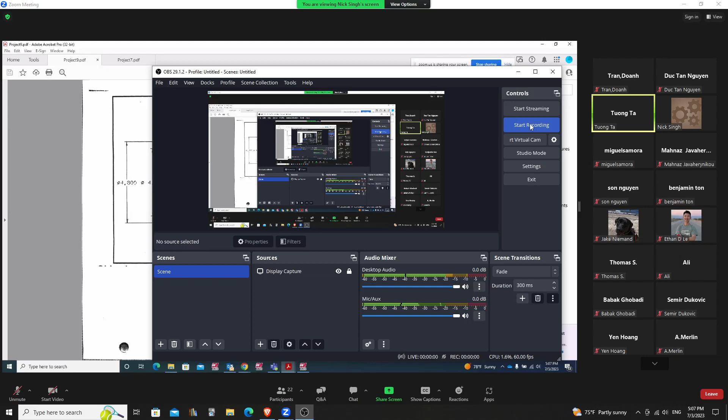So this is your project number 7, I guess, right? And here is your project number 9. I uploaded both the blueprints. You guys received the blueprint, right? Yeah, sure. Okay, good.

Okay, let's go over this project, your project number 9. Your project number 7 is pretty simple, straightforward. I want you guys to do this. So this is something I'll go over in brief, and you guys have to finish it. It's pretty simple, whatever we talk about. I'll come back and we're going to talk about this later on. This is something I want you guys to do, but I'll go over all the tool paths on project number 7.

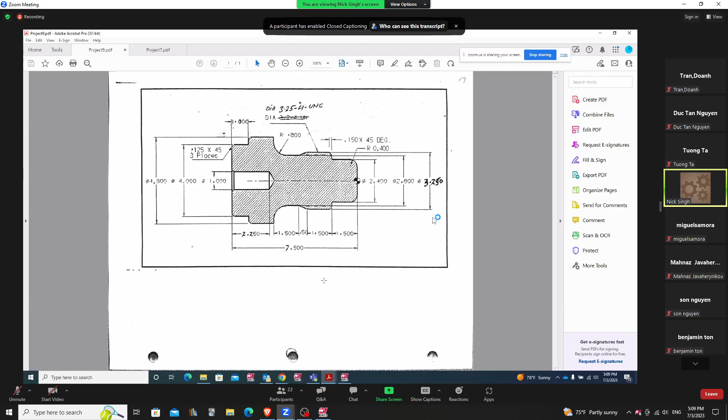So on this project, what we're going to do, if you look here, the part is a finished part. So we have two operations on this part. First we have to hold onto the part on the jaws. This is how we're going to hold onto the jaws. The jaws are going to be something like this, and we're going to hold onto the jaws right there.

We're going to face this side first, and then we're going to OD rough and finish just up to here, up to this point. But this side you cannot cut. We're going to flip it over and do the other side in second op. So here we're going to face this, OD rough and finish, and cut the threads. So this side will be done.

Then we're going to flip over, and then we're going to hold onto this diameter right here. That's how we're going to hold onto the jaws right here. And then we're going to face this side, whatever the leftover material is, we're going to face, and then we're going to drill it, and then we're going to bore the other side. So it's going to be two different operations.

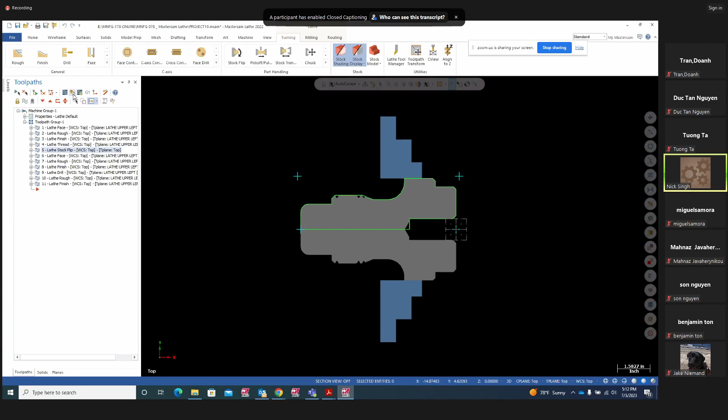So I'm going to run this whole part and show you how this works. Then we will go from there. Look at this here. The first operations: face, rough, finish, thread, and then we're going to flip it. So we'll go ahead. I'm going to do an operation change, I mean tool change, and we're going to cut it.

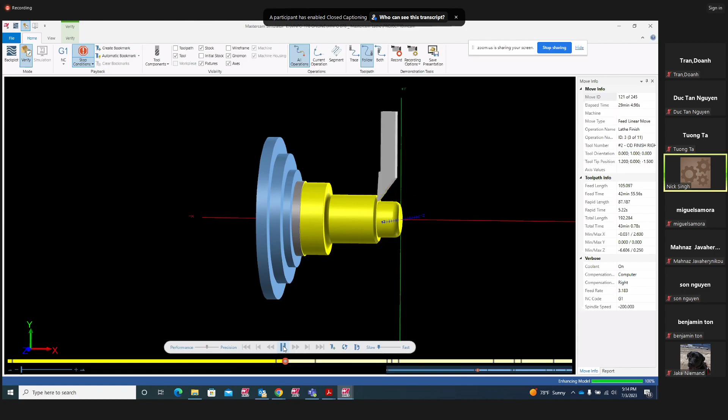Look at this. We're going to go slow. So it's going to face this side. Then it's going to rough. So here comes your roughing operation, and then you're going to just go ahead and finish it with the finish tool, one pass. Up to here. Just keep an eye on that.

I'm holding on to the maximum diameter here, but I'm finishing up to here. Up to here means, if you look at this blueprint, I'm cutting up to here. We're facing it, OD turn, rough, and finish up to this mark right here. We're not touching this side. That's where I'm holding onto my jaws. This side is not done. I'm just doing this part right here. So we are basically taking care of this area right there.

Okay, so now I'm going to cut the thread.

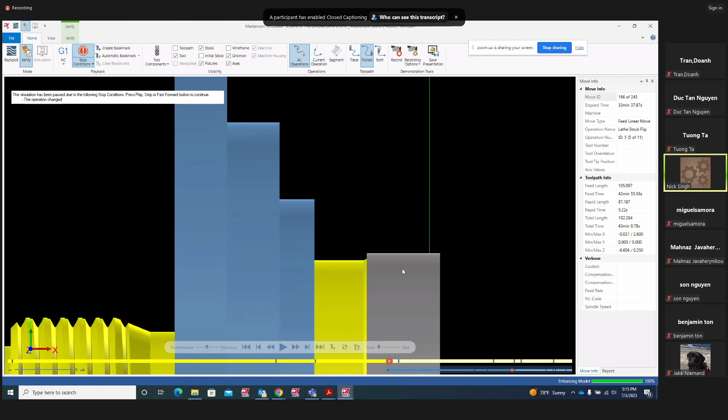Here we go, the second op. It flipped the stock, this side is done. Now we flip that and we're going to hold on to this diameter, the finished diameter, and this is whatever is left over. If you look, we have to face this because there's still material left over. Then it's going to rough and finish this side, and then it's going to drill, center drill, and bore this side. So let's do it.

Here we go, it's going to start facing it. Then it's going to start OD rough.

If you look here, now we are working on the back side, right on this side. We face this side, we OD rough this side, finish it, then we're going to center drill and bore. There comes your finish, and there's your drill, and there is your boring bar. It's going to bore the other side.

And that is finish pass, and we are done with the part. So this is going to be your finished part.

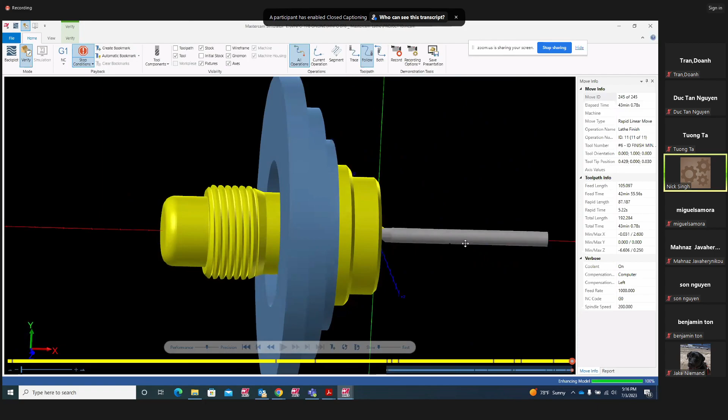First we cut this side right here. Then we use the flip operation. We flip and finish the other side. So this is what you guys have to do on this part. So let's go ahead and I'll show you how that works.

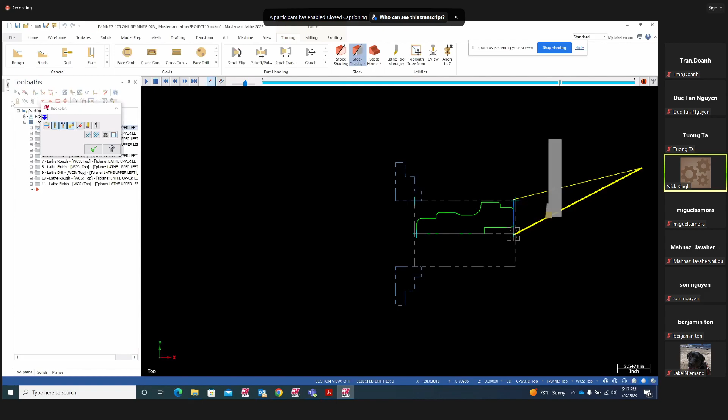So the way we're going to start with our original geometry: here we go, we're going to face that, then lathe rough, you're roughing. This is the other side, that's why it looks like that, the geometry is flipped over. So let me bring out the original geometry, and then we're going to start programming that.

Face, rough, finish, thread, stock flip. File open, and that file is going to be on my right here. Don't save it. Oh, my Mastercam crashed.

Okay, let's go find it one more time. File open, shared Mastercam. There you go.

So this is your original part. When you have to draw this, I'm not going to go over the drawing, the geometry, you should be able to do the geometry. So this is the geometry you have to draw, guys. If you look at your blueprint, it's right here.

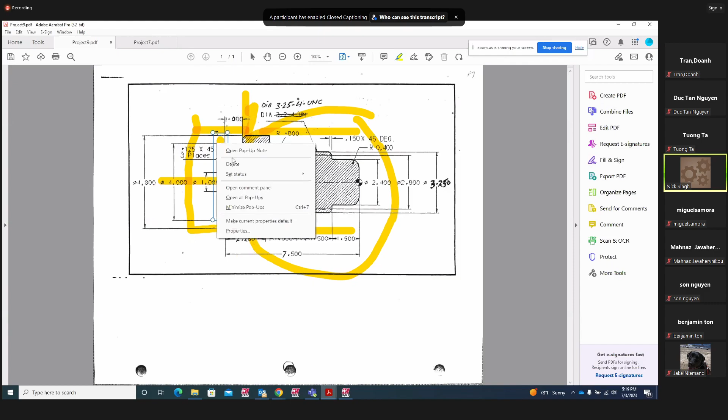So this is your blueprint. You have to draw just this area right here, the top part, just this part right there. But here we have to draw this geometry because we're going to use this geometry to flip it over and face it. Then we have to draw this one.

So we have to center drill, and then we're going to go ahead and bore it. So this is the geometry. If you look here, I have drawn it right there. There we go, that's my geometry.

So I'm holding onto here, but the first operation I'm going to do, I'm going to face it, OD rough up to here, up to this chain. We're not going to touch that. That's how we're going to just do up to here, and then we're going to thread it, then we're going to go ahead and flip it.

So this is very important to understand that the overall stock size, how much material, is going to be my total material length and the diameter. The diameter, if you look at the blueprint, my finished diameter is 4.8. So I'm going to put 4.8 plus 100,000 and 100,000 each side extra material, so it's going to be almost 5 inches diameter. So you have to pay attention that my stock diameter is 5 inches, and my overall length, if you look here, is 7.5 finished.

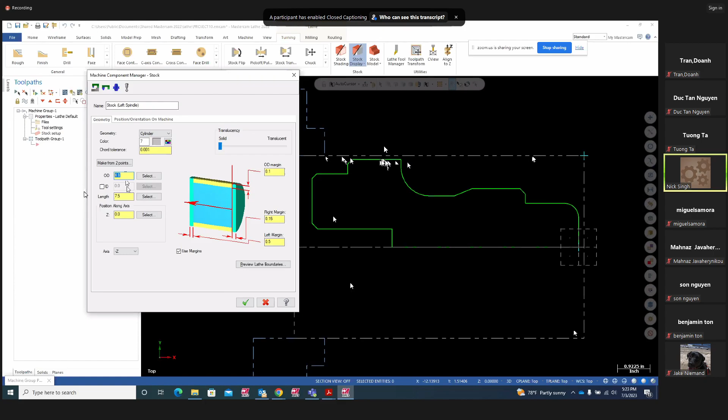That's the original stock diameter, 5 inches. Keep that in mind, because we're going to use that number when we flip it over. They're going to ask where you were holding earlier. When this is finished, this diameter is going to be the finished diameter, which is 4.8, not 5. This is my stock, the gray line you guys see, the stock line, that is 5 inches diameter right now. But when it's finished up to here, we're going to hold on to this diameter. This diameter is going to be 4.8. So we have to remember that.

Now, overall length, this is very important. The overall is 7.5, and this is 150,000 here. That's the transfer position, and we're going to use this number in our flip. So that is 150,000 on the face. Remember that, we got 150,000 on the face. So 150,000 plus 7.5, that's going to be the overall length.

That is my stock position. Overall length is going to be how much? 7.5 plus 150,000 is 7.65. Z minus total is 7.65 from the face, from the origin to here is 7.65, the stock length. The reason I'm calling these numbers, because these numbers we need when we're going to flip the stock over.

Keep that in mind. And then, this is the finished part, we're going to hold on to over here somewhere. So how much is that going to be from the Z distance? It could be 1.5 Z minus, it could be 1.6. I'll show you that, so that's going to be my final position on the other side.

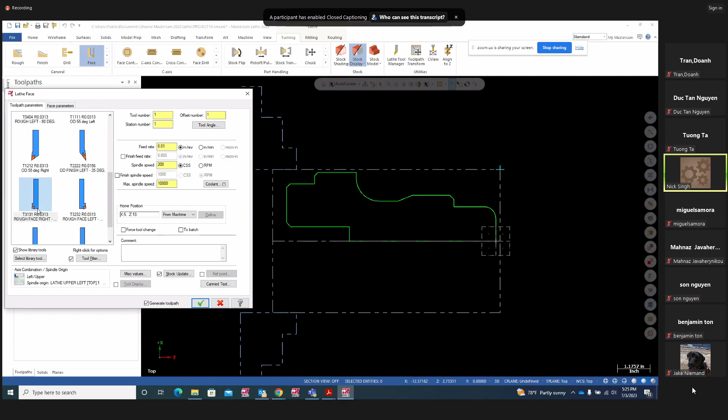So for facing, I'm going to use my OD face, 80 degrees. And here, rough step over, we can use whatever we want, 50,000, 25,000, 30,000, doesn't matter. And okay, so we're going to face it, standard, whatever we've been doing. So now I face this, we finish the face, we can start from here now.

Now I'm going to go ahead and rough it, and I'm going to rough it using my partial chain option. Don't pick chain, otherwise it's going to select this whole thing. Partial - so partial, I'm going to start from this arc right here, and I'm going to go up to here, that's all I'm going to finish. Hit end chain, okay. And I'll use an 80 degree insert tool holder.

Rough, standard, we're going to leave 10,000 on X and 10,000 on Z. Lead in, lead out, straight in, lead out, straight out. You can go this way or that, doesn't matter in this case. So hit OK.

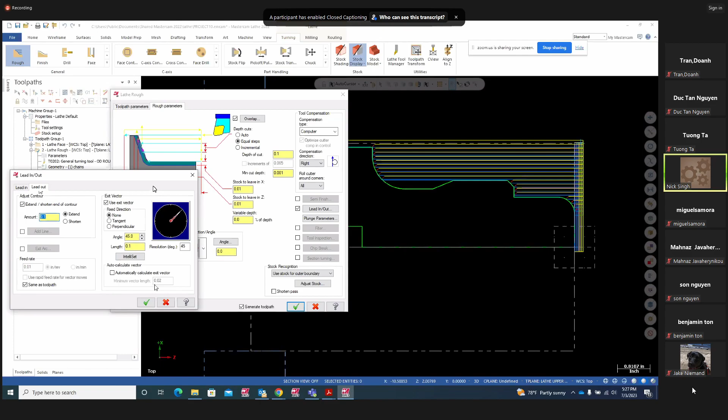And here, disable stock, use stock outer boundary, and rough it. There is my roughing, if you look here, I'm going up to here. I can go ahead, if I want, I can extend that a little bit under lead out. Extend that out another 100,000. And there you go, it went over the chamfer. So I finished up to here, that's my OD rough.

And there comes my OD finish. I can use the last chain, so just use last. And again, going up to here. Hit end chain and OK. And here comes my 55 degree tool holder, should be here somewhere right there. Hit OK.

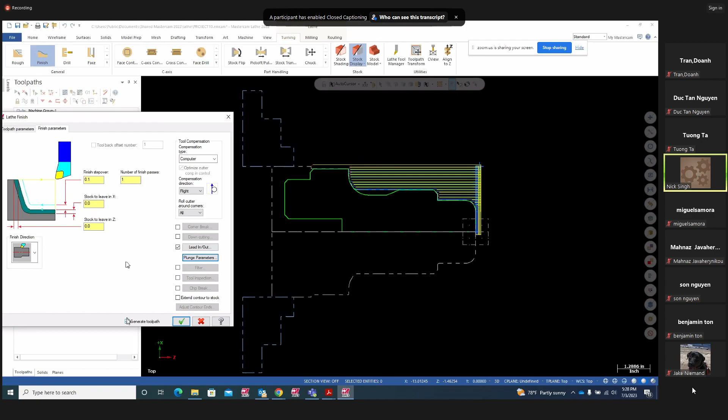Finish - I'm going to use plunge parameters, this guy over here, because I'm going to plunge into this so it can take care of that. Hit OK, and hit OK. So there is that. Select all and let's run it.

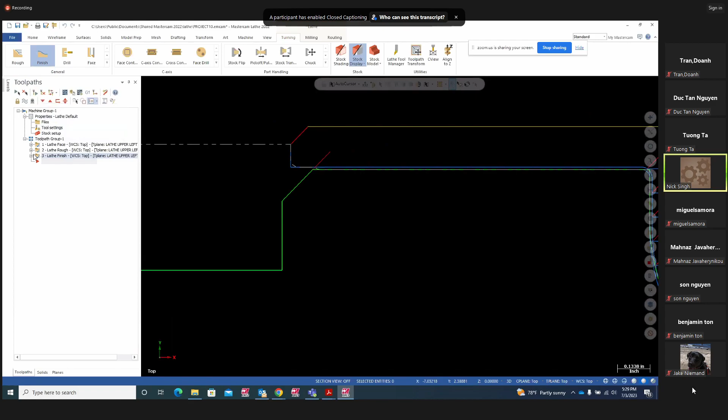Okay, we have to extend this also on the finish, I think we forgot to do that. Yeah, we forgot to do that finish, so we have to extend that also on the finish pass, another 100,000 or 150, I don't know how much we have here. We have on this one lead out 100,000, so we can go 100,000 on finish also under lead out. Extend 100,000, we're gonna go ahead like this right there. So that's good now, okay.

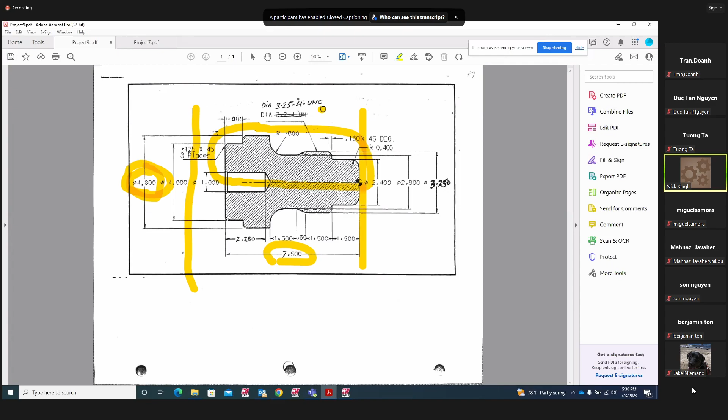Now if you look, the only thing left over here is the thread. We have to cut the thread, and we are cutting 3 1/4, 4 TPI, threads per inch, 3 1/4 diameter - so, I mean OD diameter of your thread, 3.25. So let's go ahead and do the threading. There comes my thread.

This is our right hand thread, so make sure you use OD thread right. If you're using left hand, use OD thread left.

Pick that option, and here you can type the lead number, or you can go compute from formula. I'll just type my lead here. My lead is 4, and my major diameter is 3.25, and that's it. It will calculate the minor diameter by itself from the major diameter.

So start position is right here, that's where we can start. I can say start position over here, that number is Z minus 1.5. If you're going to start further out a little bit, you can do that, but this is a good place. And end position, I can end a little further out over here. So hit OK, and there is my thread.

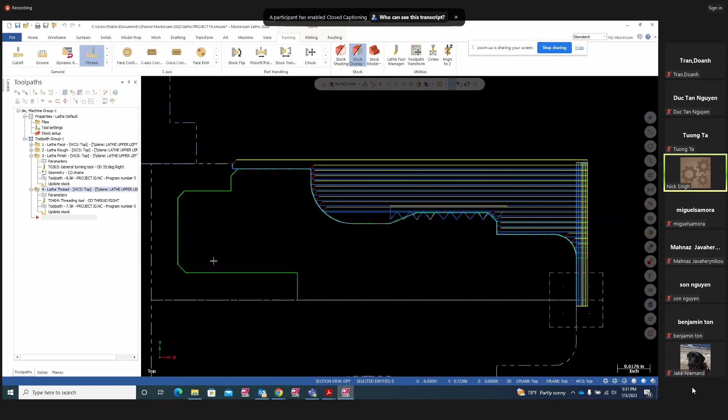There is my thread. So we are done with the first operation on this side. We faced it, we OD roughed it, we finished it, we cut the thread.

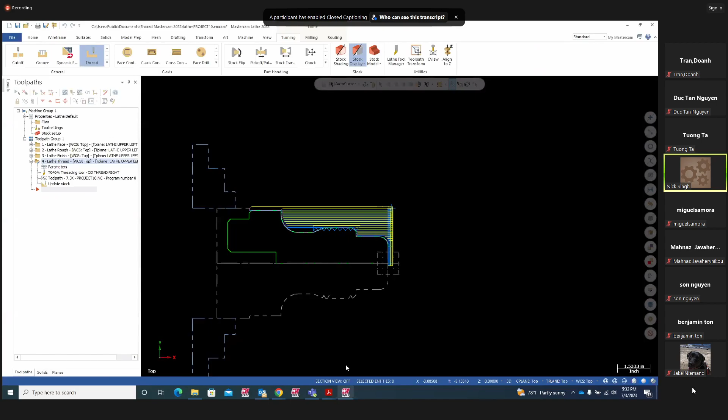So I'm going to select all and let's verify this, to verify it.

There we are. And finish. And thread. And we are done. So this side is done.

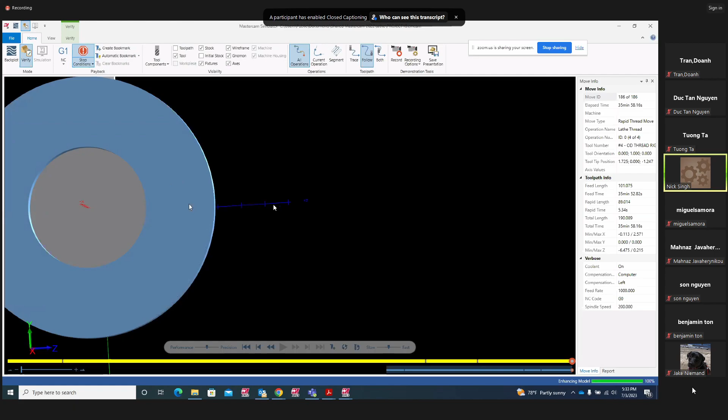Now look at that, I have to finish the other side now, this side right here. So that means I'm going to flip it over. Now when we flip it over, the jaws are going to hold onto this diameter, not on this one.

So this is what I was talking about, that this diameter is 4.8 plus 200. This diameter was 5 inches, now this diameter is 4.8. So when we flip it over, we have to tell it my original diameter was 5. Now this is 4.8, and when I flip it over, I'm going to hold it onto finish over here somewhere, so my tool can come and face and turn this off.

So now basically I'm going to flip it over like this, so my jaws are going to hold onto over here. So how much is going to be my distance from the face of the part to here? We have to figure it out. It's going to be Z minus maybe 1.5, maybe 1.6, maybe 1.7. We'll figure out a good number where I can hold my jaws over here.

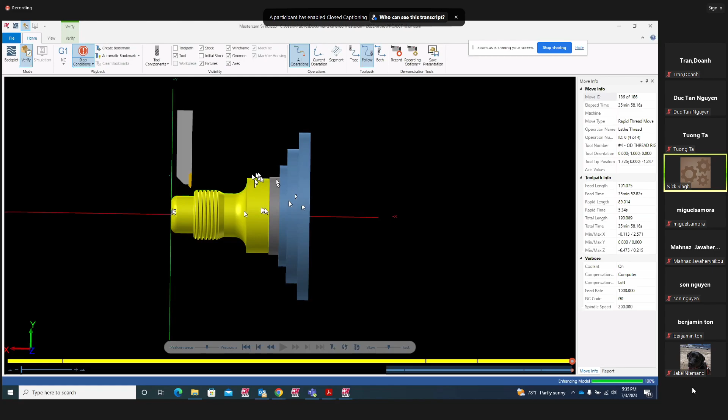So keep that in mind. And now the overall finish of my stock is 7.5, the length is 7.5. If you look at your blueprint, this is 7.5. But we have 150,000 transfer position from the origin. We have 150,000 extra on the first operation, if you guys remember. So that 150,000, we have to consider that.

So that's what we're gonna do. Isometric, go to top right there. So now we're going to go ahead and flip it over to the other side.

So there comes your stock flip. It says output a comment and program stop in the NC code. So here you're going to stop this 1, 2, 3 after 4 operations. Your part is done, your machine is going to stop, you're going to say M0, stop it.

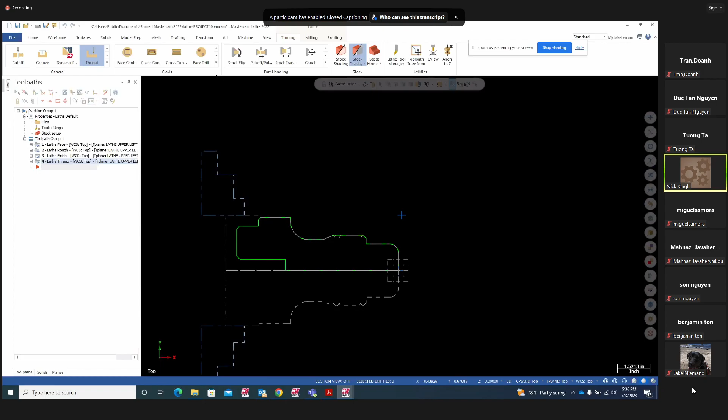You're going to take the part out and we have to flip it over to the other side. Then we have to set up your zero again on the machine. So here, after you've done this, you say stock flip, and look at this, this comes a new setup now. So this is what I'm talking about earlier, this is what I was talking about, what's going to be the original position of your Z.

If you remember, I told you that we have 7.5 and we have 150,000 extra over here, so total is 7.65. That number is going to go right here, your original stock position, that is minus 7.65 original.

We are talking about original position. Transfer position, we had extra 100,000, 150,000 material over here, that's where we want to transfer, because my zero is from here to here. My Z0 is 150,000, so that's where we want to transfer that, my origin. So here my transfer position is going to be Z.150,000.

Original position of the diameter - if you guys remember, I told you that we have overall 4.8 and we have 100,000 material each side, that's 0.2, so 4.8 plus 0.2 is 5 inches. So our stock here, original position of the diameter was 5 inches, and original position of the finish size is, if you look at here, that is 7.5.

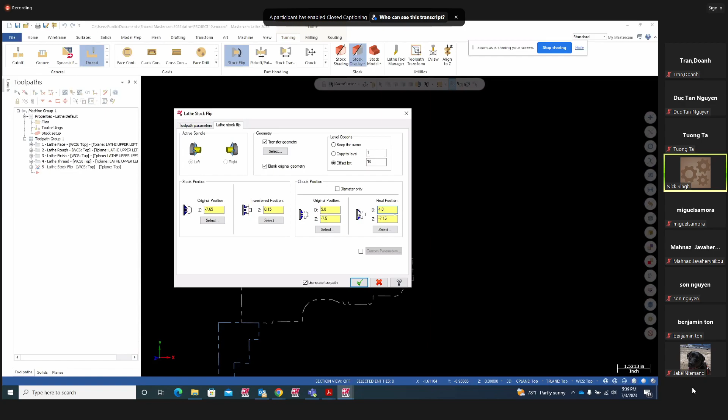So here, my final position where I'm going to hold is going to be 4.8. And once it's going to flip it over, where I can hold, I can try with Z minus 1.5. This number I'm talking about, from Z0 of the part to here, that's where I'm going to hold when I flip it over. I'm guessing it's 1.5. If we have to go further out, we can, I'll show you that.

So let's put Z minus 1.5. And here you're going to say transfer geometry. You have to check out this box. I want to transfer this geometry to flip it over.

Blank original geometry, this is going to be blank. If you check this, then you're going to have two geometries, your original and the flip over. Then you're going to get messed up with that, you're going to get confused. So you say blank, you do not want to see that other one. You want to only see the new one.

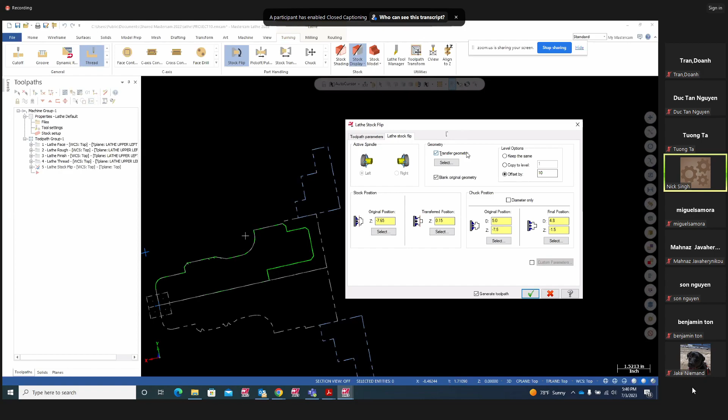And I'm going to select the geometry. So go to select, transfer geometry, blank the original geometry. After you have all these numbers, you say select the geometry. It says select entities to transfer. I'll go to my top view here and select all these geometries right there. There you go. End selection.

Blank geometry is on. As soon as I hit OK, it's going to flip over. Watch, there you go. My stock is flipped. And here is my origin finish.

This is the 150,000 I was talking about. So overall from here to here is your 7.5 plus 150,000, which is this number right here. If you look at parameter, that's 150,000 right there. So the machine knows how far it has to cut to make it zero. That's his 150,000 material left over on this side.

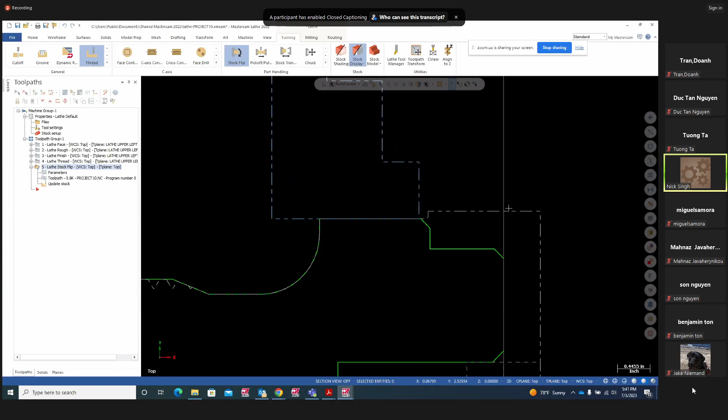Hit OK, and that's how it's going to flip. Now look at this, how far we are holding onto the jaws from zero. I put Z minus 1.5. If you look at here, I put that number Z minus 1.5.

I think that maybe my tool is going to, it's not going to touch, it's going to crash. So let's say I'm going to move my jaws a little over here. I'll try Z minus 1.6 or 1.7 or 1.750. I can hold it right here, so my tool is going to be all clear.

Because this diameter is finished, if you guys remember, we finished it on the first operation. So I'm going to change my Z from here to here. Go to parameters on lathe stock flip and say my Z minus, I want to go 1.7, minus 1.7. That's where I'm going to hold, 1.75.

Okay, watch my start, look at this. Now it's good. From the face to here, Z is minus 1.75. Let's say if I'm going to put Z minus 1 inch, or minus 1.2, doesn't matter.

You're holding your jaws over here. When your tool is going to turn this diameter right here, it's going to come and crash. So that position is from the face where you want to hold your jaws for the second operation. The distance is from here to here. Now I put 1.75, it's holding right here.

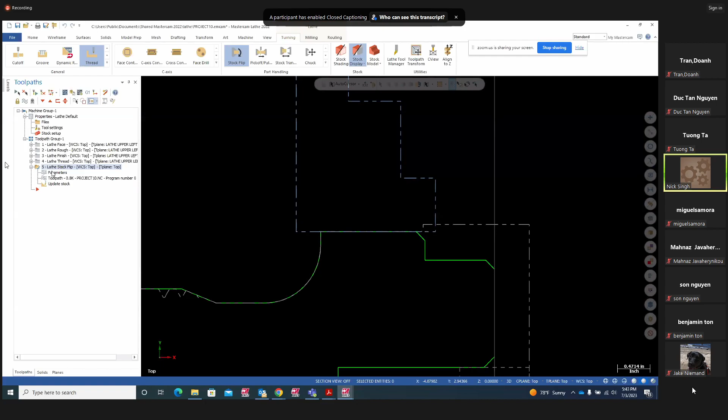So this is your jaws. When your tool is going to OD rough this geometry right here, it's going to crash over here. So keep that in mind. 1.75 is a good number right here, Z minus 1.75.

And there is that, that's your stock flip. And now we can just go ahead and face this because the machine knows how much material is left over on this side, it's going to face that. Then we're going to OD rough and OD finish up to here.

Then we're going to drill it and bore it, and we're done. So these numbers play a big role to get the finished geometry of your part. This matters because we are not parting, not cutting this part off like we do other parts. We don't have any extra stock, we are working close on the whole length, and that number depends on how much was in the face, how much is the total Z minus finish. That Z will control your depth and your diameter where we are holding earlier and where we are holding on the finish.

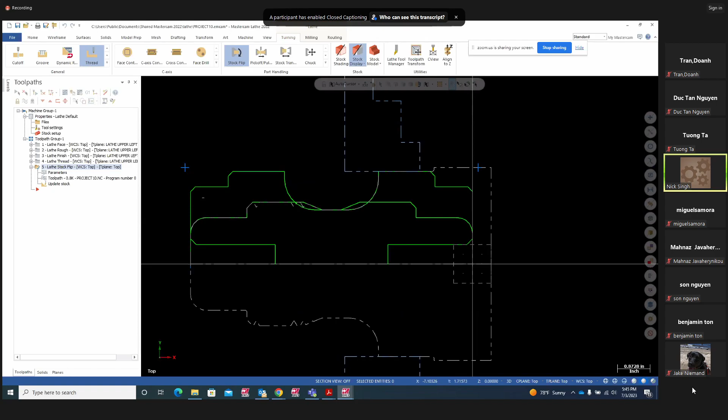Hit OK. So it flipped over, but make sure you guys transfer the geometry. Make sure you check that box, and when you say select, you select the entire geometry and say blank. If you say unblank it, look what's going to happen here. You see the original geometry, the one we used for the first operation, and that's going to confuse you as to which geometry to use for the second op. So make sure you blank it.

Now you have two geometries here, one for the first operation and one for the second operation, the one we flipped over. So keep that in mind. Say blank that - you do not want to see the original geometry right there. Blank it. Here we go. All right, so we are good to go.

Okay, dokie, let's move on. Now, after we flip the stock, we're going to go ahead and use the same operation. OD rough, OD, we're going to finish up to here, and then we're going to center drill and bore that. All right, face it. Let's do the facing.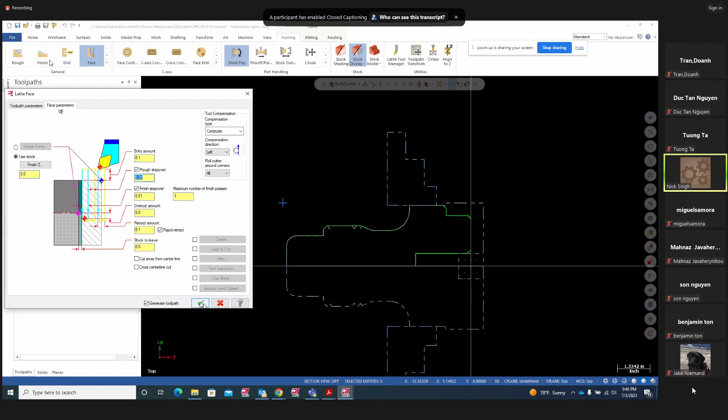There is my face. Let's use the same tool. Whatever you want to face it with, you can face it up at 50,000 each pass. That's good. Hit OK. We'll face this side - look at that. The extra material we had on the other side, it's going to face it off.

There we are. All right, so we faced it.

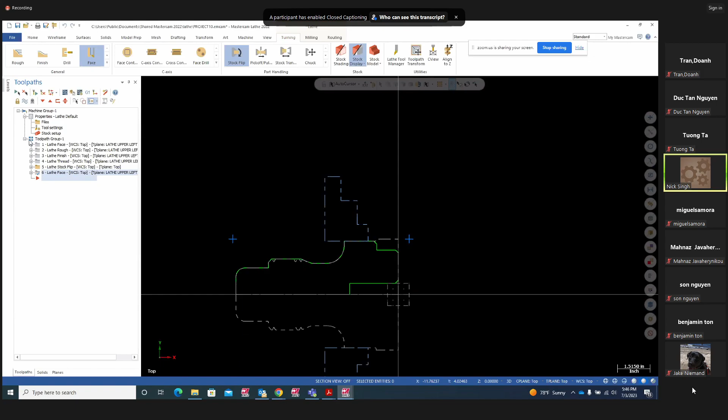And now we're going to go and rough and finish it. So we're going to say rough it. Again, use partial - I'm going to rough it out from here up to here. Don't select this one, this is already done in the previous operation. This is finished. Now we are finishing what's left over here. Hit end chain and OK.

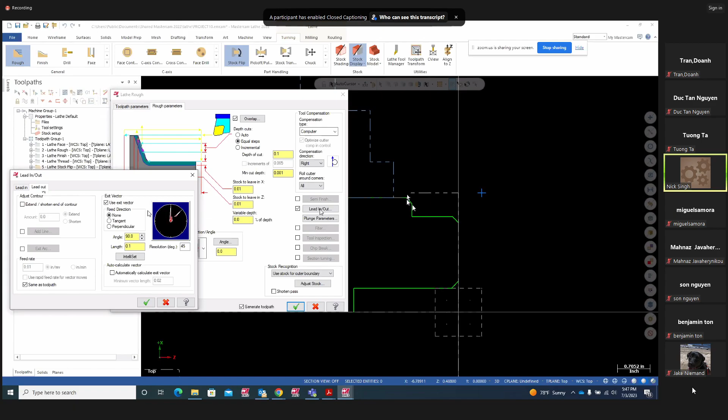OD rough, 80-degree insert, we can use the same standard. Lead in and lead out - make sure it's not extending out. Yeah, no, it's good, and I can go straight from here up. We can go like that also. Lead in is good. Hit OK. Hit OK, that's going to finish it.

So we have lathe face, OD rough, and OD finish. Finish. Finish and previous last chain.

Hit OK. And I can use 50 - we can use a 55-degree tool holder. Hit OK. And there is that toolpath.

So if I'll go ahead and try this lathe rough. Okay, we can go with face. After we finish the stock flip using lathe face, rough, and finish, let's go ahead and run that one.

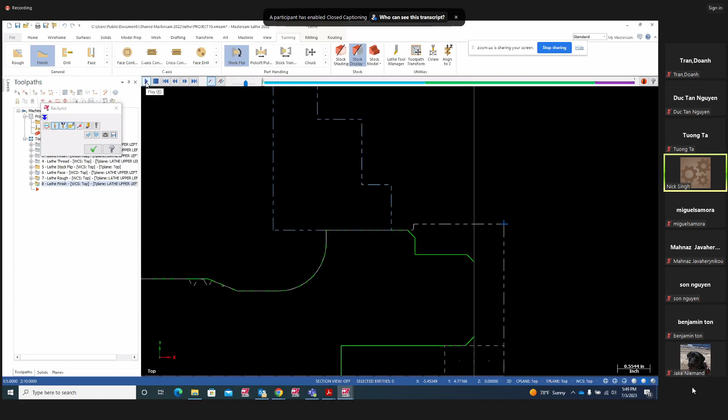Here's my facing on the other side. And there is your finish.

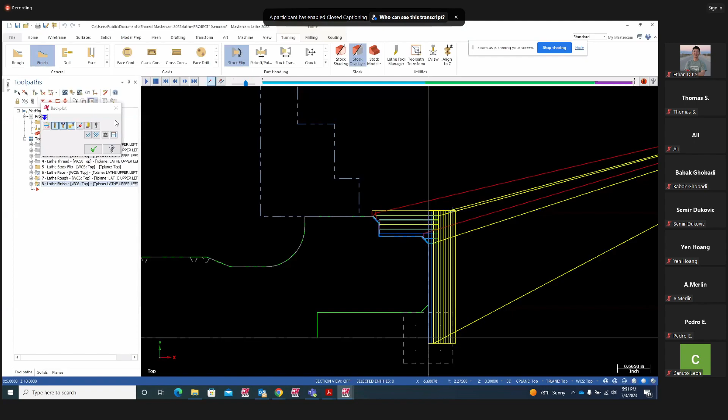So that will take care of that. And if we select all, I'm going to verify this. This is how it works. It's going to go face it, rough it, finish it, thread, and flip.

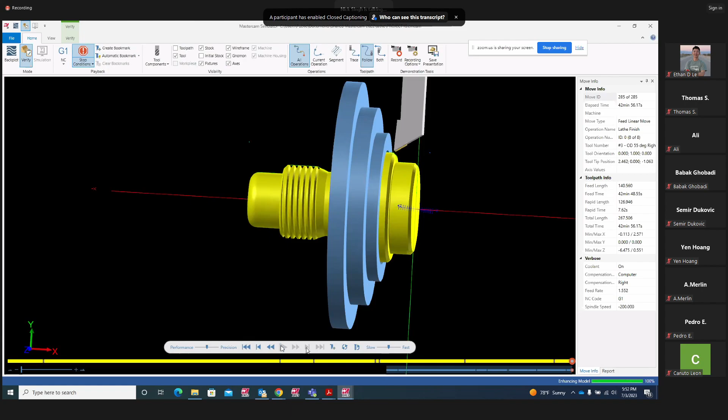Once it's going to flip it, it's going to face the other side - face it, OD rough, and OD finish. So we can go ahead and use center drill, drill, and bore this side.

There we go. All right, so here comes my drill. Center drill, I can go use drill, and that's my regular drill, spot drill right here, 750 spot drill, we can use that. Simple drill, no peck. The depth I can go about minus 250 on the depth.

On the depth, it's going to be regular G81 drill counterbore. Drill point is going to be X0Z0. Clearance is 250, and we are good. Hit OK, and there we go. It's going to go ahead and drill that hole right there.

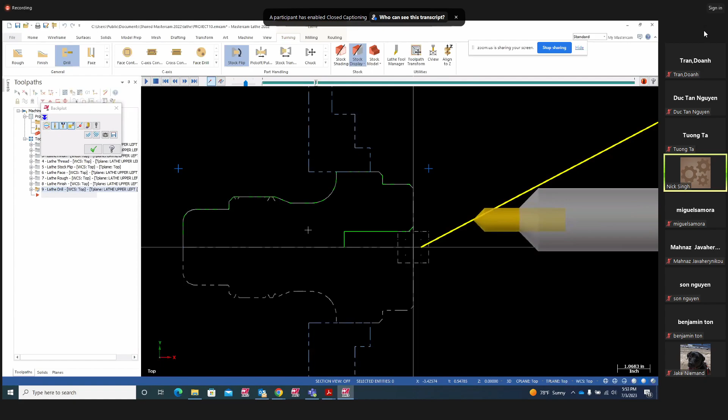There we are. And now we can drill it. So if you look at the drill, this is Z minus 2.25 depth, and it can go further out.

We can compensate the tip, so let's go to minus 2.25 on the drill. I can just go ahead and right click, grab it, drag, click it, and say copy after. So I can copy that, just use a different drill if you want to.

And we can select from our library, or you can just go ahead and pick the same option - I want to drill it, and here you can pick your half an inch. I'm going to use half an inch, 3/4 drill. So if you look at your blueprint, we have 1 inch finish diameter right here of the hole. So I can use 750 drill, 3/4 drill, and the rest left over we can just go ahead and bore it. When we bore, we're going to make this chamfer also at the same time.

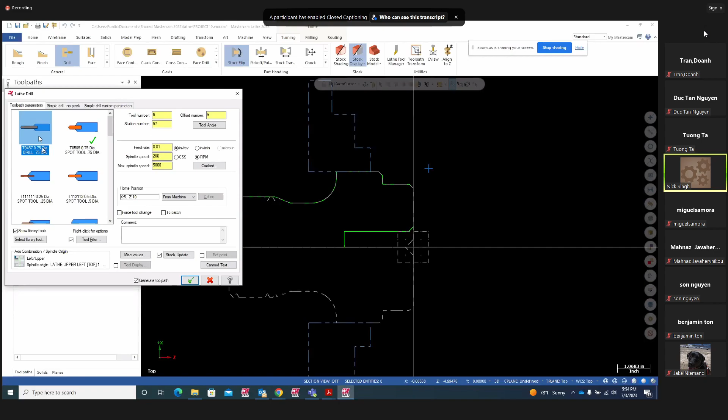Okay, so use 750 drill and no peck. Here comes my depth - I can just go ahead and set depth, looking at my print, my depth is 2.25. I can go 2.25 on the depth, and if we have to extend that further in, we can do that also. So let's start with depth minus 2.25.

And your options are drill, counterbore, peck drill, whatever you want, you can do that. Hit OK. So it's going right to the tip, that's fine, and the rest we can go ahead and rough it out, and we can finish it. So this is the material left over right here, guys - that's what we're going to clear with our boring bar. So there is my drill.

And now we can just use the same operation, rough and finish, to bore inside. So use your rough, and here comes my partial. I'm going to go right from here to there.

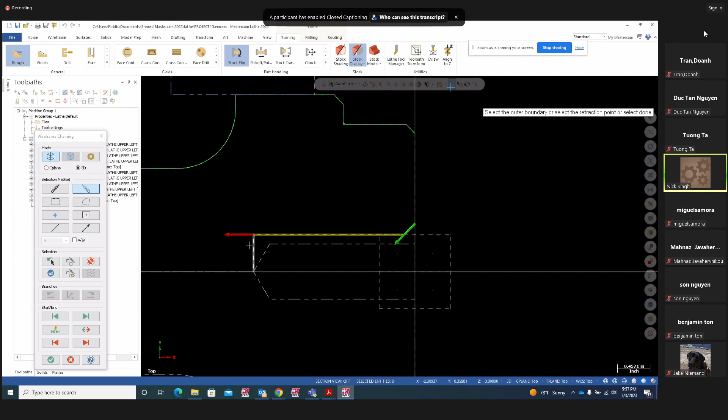We can extend the depth of the drill a little bit more. If you look at the blueprint, we can use the tip compensation option. 2.25 is to the finish bore side, so we have to compensate the tip. We can use that parameter, tip compensation drill, to compensate. We can put that number here.

It's going to be 0.25. We can go even a little less than that. This is a little bit too much. 150 should work, maybe even less. Okay, yeah. There you go, 100,000 is a good number.

Drill depth is 2.25. If I uncheck this and use my drill depth calculator: 2.25, standard drill, included angle 118 degrees, 75 diameter finish diameter - look at this, my add to the depth is 0.225. That's a little too much, I guess. Let's try 2.475.

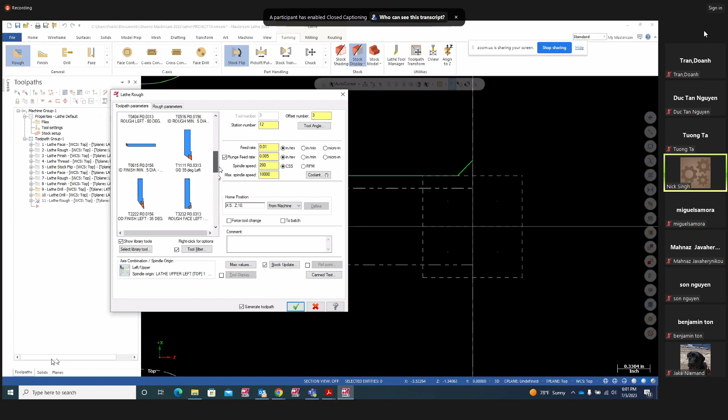Now the boring bar we're using - don't use 750 diameter, because this hole is 750 diameter. So if you have a same diameter boring bar when it's going to rough, this hole is going to retract, and the other side is going to hit on the material inside. So use a 1/2 inch diameter.

Let's see if we have 1/2 inch over here somewhere. 250, 750, 375 - we should have a 1/2 inch diameter boring bar somewhere. Okay, there we go, we got 1/2 inch right there. Rough parameters, just like your OD rough and finish I mentioned in our last class, guys.

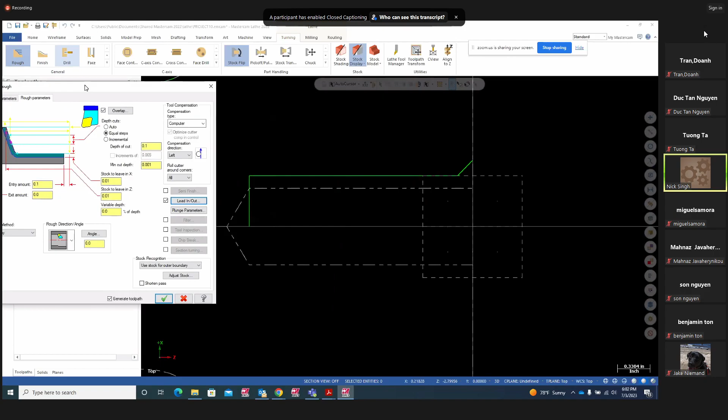Depth of cut is good. So lead in and out - look at this, lead in and out. Lead in is going straight in. Let's move this guy over here. Lead in and out, so it's going lead in straight into the part, and lead out is going at an angle, but I can make it come straight like this.

This is coming at an angle, let me show you what I'm talking about. So there we go, look at that here - it's cutting and coming out at an angle. I want it to come straight a little bit further down. So let's go and rough it and see what we got. There we go, that's good.

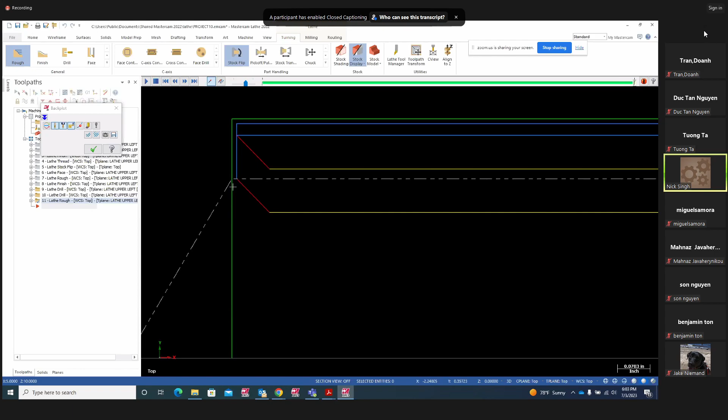Perfect. So here, if I want to, I can extend down a little bit my lead out so it can take care of this little corner right here. So I'll go ahead under lead out - I don't want to come at an angle, I want to come straight like this. This is coming at an angle. Look at this, lead out is coming at an angle out. I want it to come straight so it can face this face at the total depth.

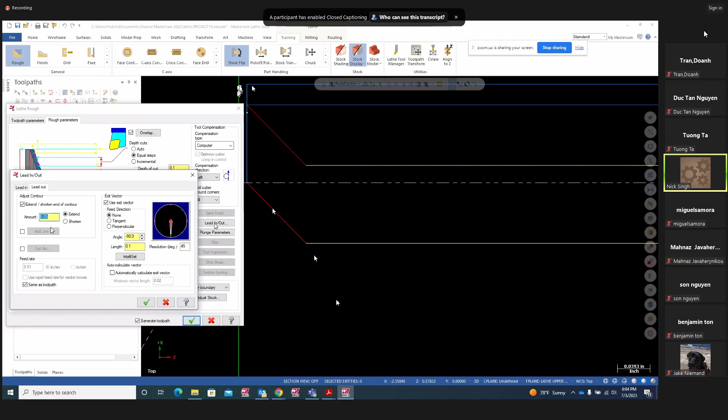So I want to come this way, and extend that about 50,000 or maybe 100,000 - 50,000 should be good enough. Hit okay, hit okay. Now what happened - this is not right. It went - oh no, I hit the wrong spot. That is not good, so we extend that lead out so it's embedded. Look at this, what happened here? That's what it's doing.

I did the wrong one. Look at it, it's coming into that. That's what it's cutting, here we go. It's cutting too much, it's going to crash. So that is not good.

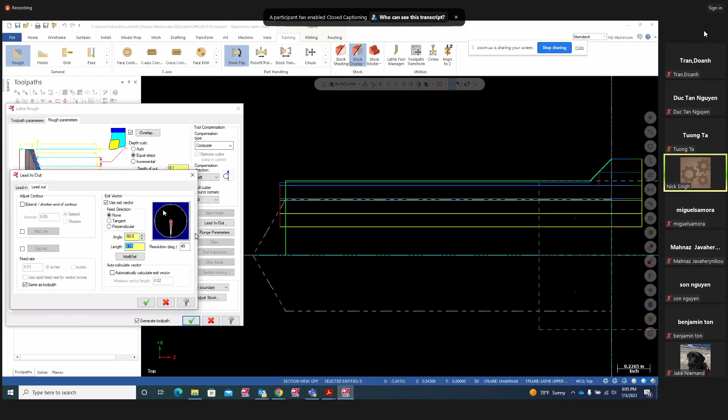So go lead out, not extend this guy here, extend this guy over here. It's 100,000 right now, I'll go maybe another 50,000. Make it 150. 90 degree coming down straight, but it's going to go 150,000. Perfect, there you go, look at that.

Okay, watch here, it's coming down there. Clear, clear, clear, so that's good. Coming another 50,000, but make sure it won't hit on the other side. I think we are clear. We are good. Okay, rough it out.

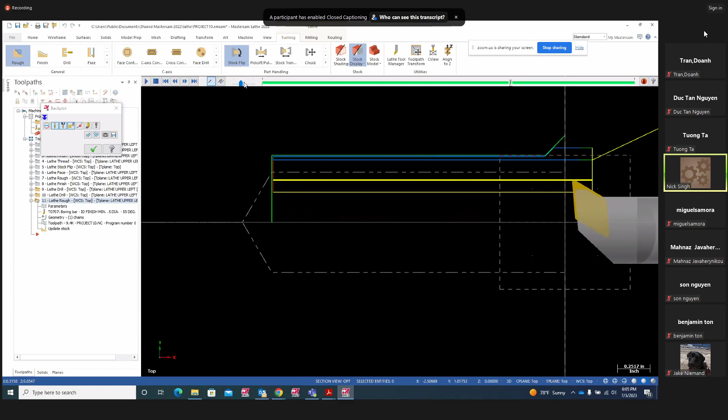All right, lathe rough, and we're gonna do lathe finish. There we go, my finish. And we can use last.

Hit OK, and I can use the same tool to finish it. And lead in, lead out, same thing, lead in, I'm going 180 degrees, lead out, go 60 degrees, and extend that also to 0.150.

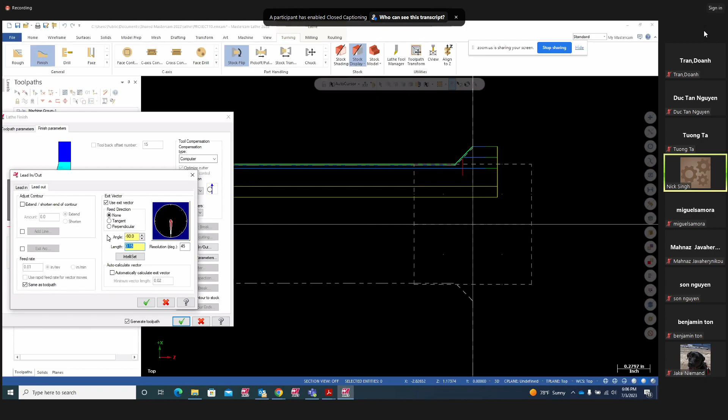Come on. There you go. And hit OK.

Rough and finish, this is your finish pass here. So let's go ahead and run the whole part.

So I'm going to stop operation and face that. OD rough, finish, thread, and flip. There comes my face.

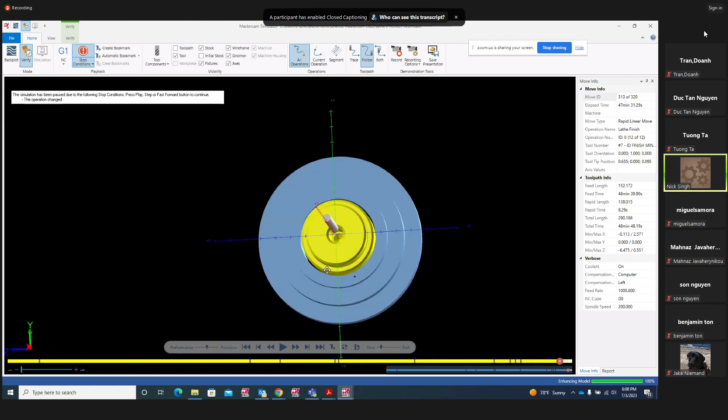Here comes my ID rough, finish, spot drill, drill, and bore. There we are. That is your finished part.

So here going to talk about this lathe stock flip operation number 5. This is very important, guys. These numbers are very important.

And these numbers got in my original position diameter 5 inches, 7.5 the total length of the stock finish. We got it from the blueprint here, 7.5. That's my total, this thing, the 7.5. 4.8 is my finished diameter, which we got it from the print right here.

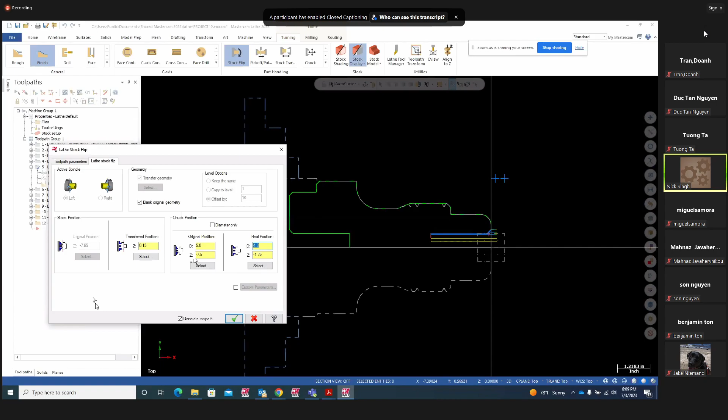And then we have 0.150. That's the original amount we had left on our stock setup, 0.150. So these all are based on, make sure you set blank original geometry, and when you select the geometry.

And looking at this stock setup, your original, this is my 4.8, 0.100 on each side, total is 200. 4.8 plus 0.2 is 5 inches. Stock margin outside is 0.150, and that's what we had on that.

Overall length was 7.5, and we added another 0.150, it's minus 7.65. So if you remember that, we put that under stock flip. We put here 0.150 right here. The original position is 0.150 plus 7.5. This is the original position, 7.65 right here.

So these numbers are very important to get the exact length of the finished part on the second half.

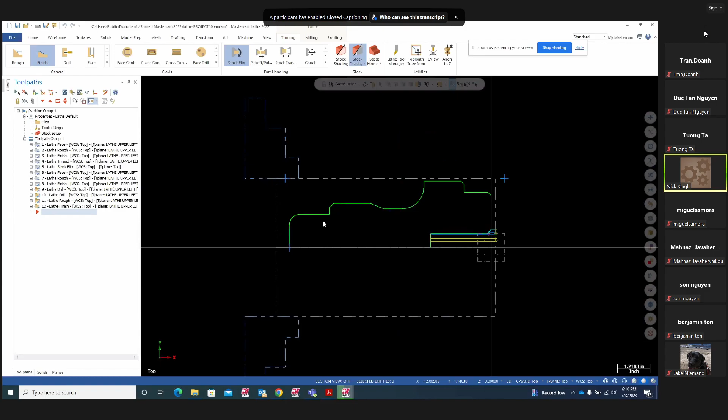So select all one more time. And if you go ahead and run it, and there it is.

Face, OD rough, OD finish, threading, face, body rough, finish, spot drill, drill and boring. There you go.

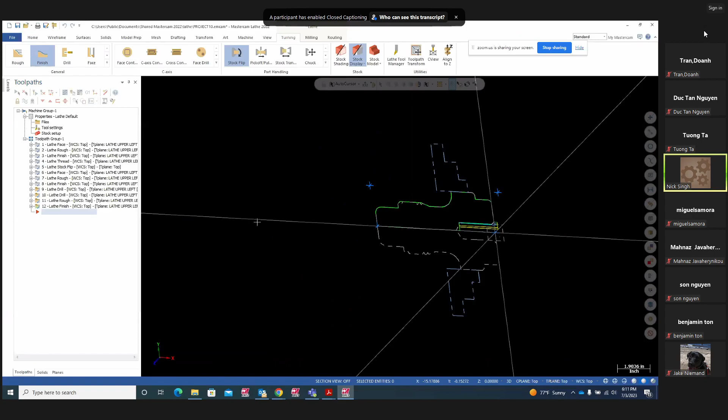There that is. So I want you guys to work on that.

So going back geometry, so your finished geometry, once you're going to flip it over, this is what you guys are going to do. This is what you're going to see. After you flip it, your geometry is going to flip over.

And this is what you see, because if you remember, under stock flip, we picked that option, transfer geometry and blank original. So original, the one you see right here, that's original. If you look at here, this is my original. That's what we selected. Once we selected and we said blank and you hit OK, it flips over and it does blank that one. Look at it.

So this is the finished geometry you're going to see on the second half after your stock flip.

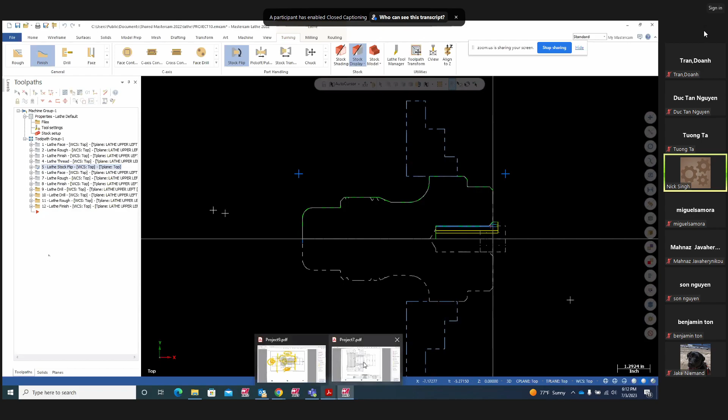All right, so this is that, and let's go ahead and look at this project here. I'm going to show you the toolpath on this. I want you guys to finish it.

And again, the geometry on this one here is, guys, you're going to just draw just like this we did on the other side. Here, see what you guys have to draw.

So this is, you don't have to flip on this one. We're going to use a parting tool on this one. So you're going to face it, OD rough, OD finish, then there is OD thread, I guess.

No, there's no thread, but there is a thread. 3A right here. There's a thread over here. 4.5 10 UN is 3A.

And there's a thread inside, right there. Cutting thread inside 3.5 12 UN is 3B. So 10 pitch outside, 12 pitch inside thread. So you bore it and then we're going to thread it.

So let me get that geometry here. The project is going to be open. I think it's going to be project number.

This guy right there, yeah. All right, I don't want to save that.

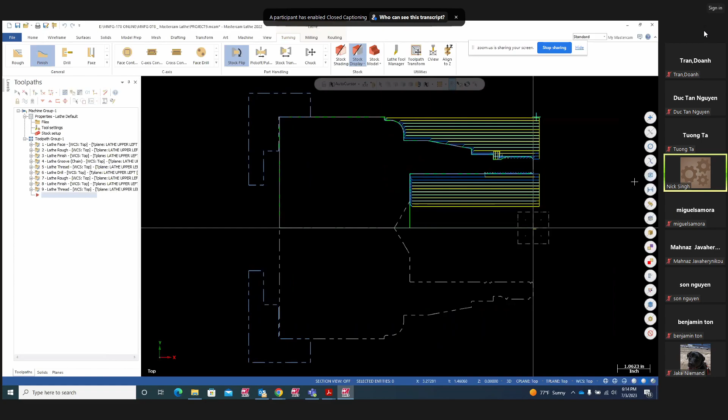So if you look at that stock here, you can go shape down. So this is that part right there, and this is the geometry you have to draw it. Let me go ahead, turn the recording on.

Recording in progress.

Okay, so let me go ahead and... Sir, quick question. Yes. Is that little... hold on... spike? Oh, sorry.

Recording stopped. Hello. Yeah, go ahead now. All right, oh yeah.

That little spike on that picture, are we going to drill that, or are we going to add that to the geometry? You're talking about this project or this one? That one exactly. So what's your question? 4 inches or no, what is it? 4.5 inches. This is 4.5. That's that little thing right there, it looks like a drill. I mean, are we going to do that on the geometry, or is that going to be separate?

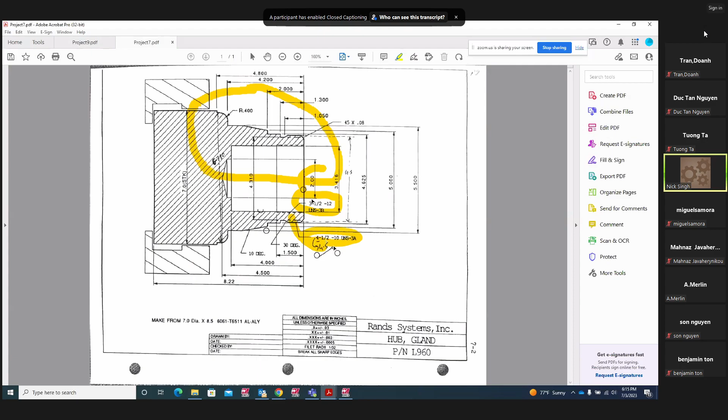You're talking about the drill inside right here? Yeah, that little one right there where the... so you look at this, you're drilling it to 2 inches diameter. Okay, and then? Then you're going to bore that to this geometry like we did earlier, up to here. And then that little part right underneath, then you're going to cut thread inside. There's a thread, that is the thread right there. Oh, okay, all right, just wanted to make sure.

Thank you, sir. No, I'm going to go over this, I'll show you. We'll run that operation step by step so you guys can have that in your video and you can see it. We're gonna center drill, then we're gonna drill that, then you're gonna bore that, and you're gonna cut an ID thread. All right, sir, appreciate it. Thank you, no problem.

Recording in progress.

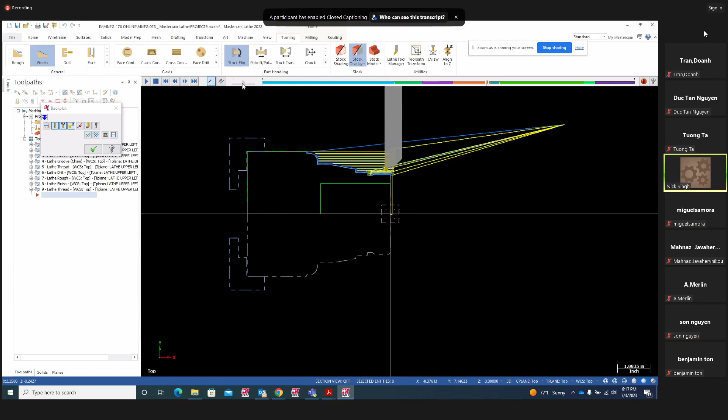Okay, so here we go. Let's run this part. We're gonna go ahead and face it, OD rough, OD finish, groove, and OD thread. I'm going to run lathe face, rough, finish, groove, and thread. So we're going to go ahead and do the groove and thread. So let's run these 5 operations.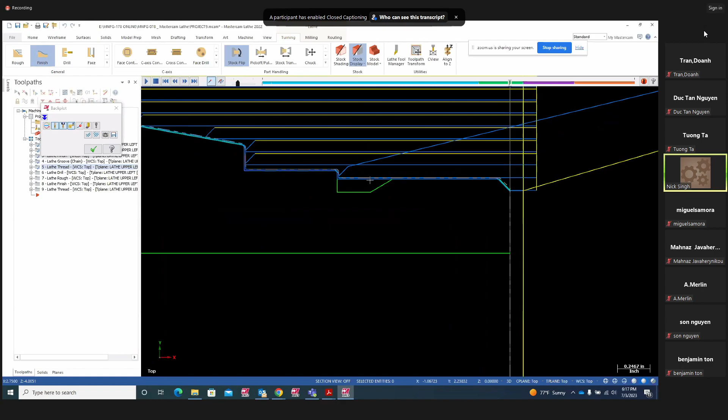Face it. OD rough it. Finish it. Then we're going to groove this part right here. This is going to be a groove. There you go, that's your groove. There we are. So that's going to be for your OD.

And then comes your drill. And then rough and finish. I skipped the drill, spot drill. If you guys want to add, you can add a spot drill here. So there comes my drill.

Here comes my boring bar. I'm gonna bore it. Rough. And we're going to just finish with the same one, use the same tool to finish it. There you go, and done. And there comes my threading.

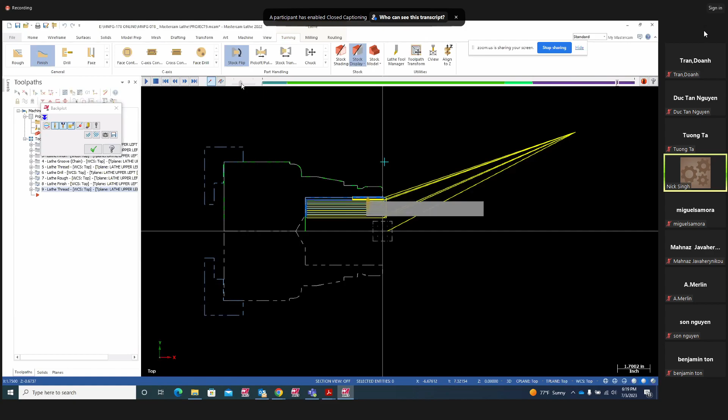That's it. So talking about lathe thread ID, if you go to parameters, you're going to pick up the thread tool path parameters, you're going to pick up the tool. If you pick up this tool right here, guys, you can tell it's an OD thread right hand. This tool, you're going to pick ID right hand thread. So that is the different geometry for this. This is for outside, this is for inside.

So you're going to use that, and then the thread shape parameters are all the same, just like we did earlier. Lead, or you can go from table, or you can compute from formula, put these numbers here, how many leads you have, and the major diameter and the minor diameter is going to calculate by itself. And rest everything is same, but only difference is the tool you're going to select.

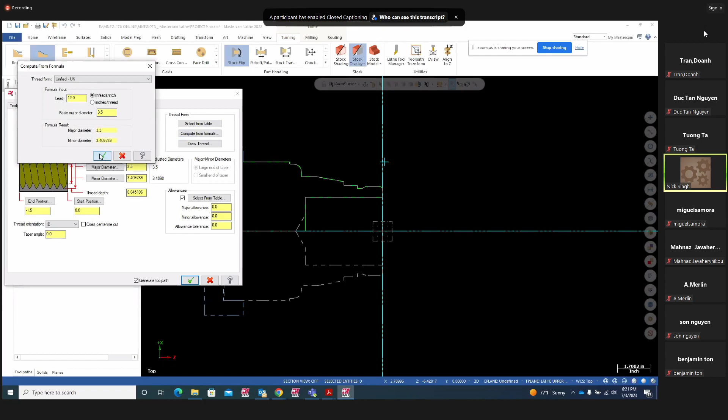So you're going to select ID thread, this guy right here. That's for your ID. This is for your OD, the one we use for outside. So just use this guy right here, and rest everything is same. Just pick from the formula or from the table and insert those numbers. And thread cut parameters, you can use canned cycle, which is going to be a G76, or you can say longhand, doesn't matter what you want to use it. And rest everything is same, it's going to cut thread inside.

So I want you guys to do this part right here. So if I'll go ahead and select all and verify it. Paste it.

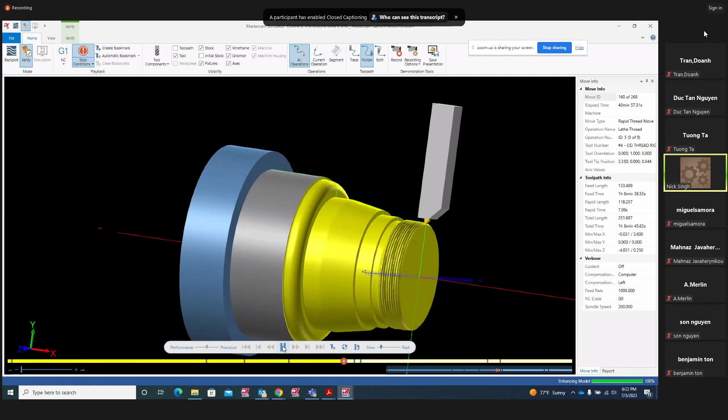Groove. OD thread. Drill and bore. And there comes your ID thread.

It should be ID thread, not OD thread. Okay, when you move this, you see this OD thread. There comes my ID thread. Finish it. Perfect.

So that is that. View.

All right, so that's what you guys have to do on this project right here. So you have to just create this geometry right here. You don't need the back over here. And I didn't add the parting tool here. If you guys want to add a parting tool, cutoff tool here, you guys can cut off anywhere you want. That's not a problem.

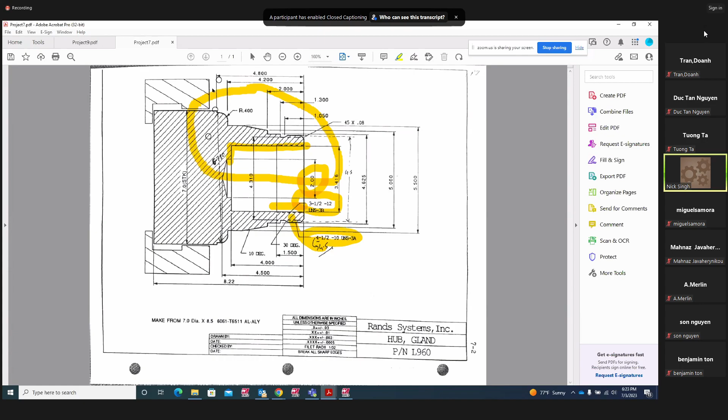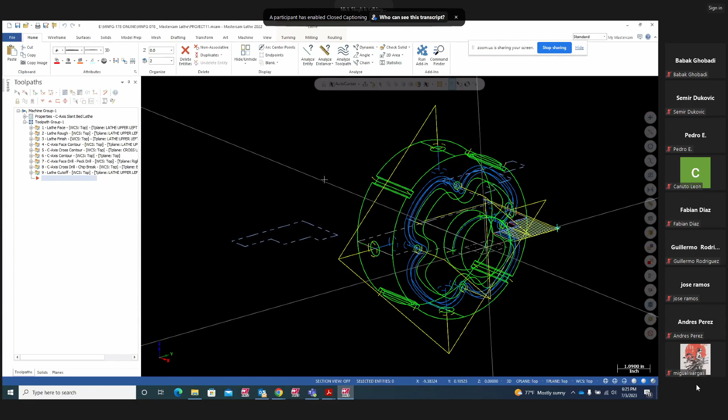Okay, part like this, part like this, part like this. Look at this here. So this is your part where you use C-axis stuff, means you can turn it and you can mill it. So here, face it, OD rough,

OD finish, and face drill. You can drill on the face. And mill it, mill this with a milling, C-axis mill. Look at that.

So this is called your C-axis. This is very common practice, guys, on the mill, on the lathe machines have a capability of C-axis. So it's going to mill the face. This is called live tooling. This is all live tooling.

So, and then we can drill on the side, and look at this. You can drill and cut this on the side right here, and you can cut this slot over here, mill this, mill that slot right there, and then you can drill on the diameter right here. Look at that. And then you can cut it off.

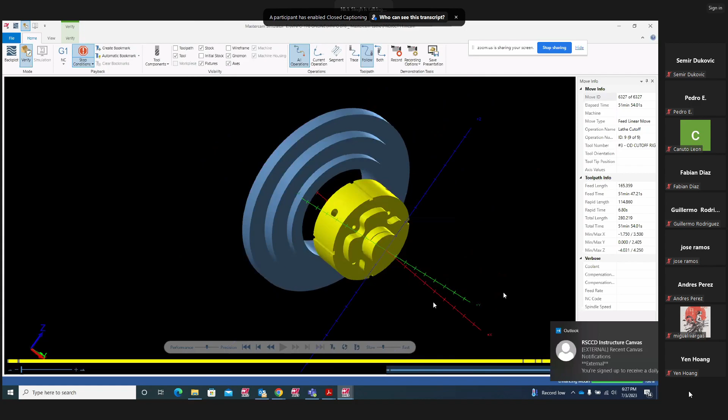If I'm going to take the wireframe off, this is going to be a finished part right there. So this is turning and milling both. So that's called your C-axis.

So now we're going to jump into this, guys. I'll go over that, how, if you look at the geometry of this part right here, the geometry, we have to create two different geometries. The first geometry we're going to create is going to be just for your OD diameter, something like this, what is going to be my diameter based on that print. So this is where we're going to do lathe face, rough, finish.

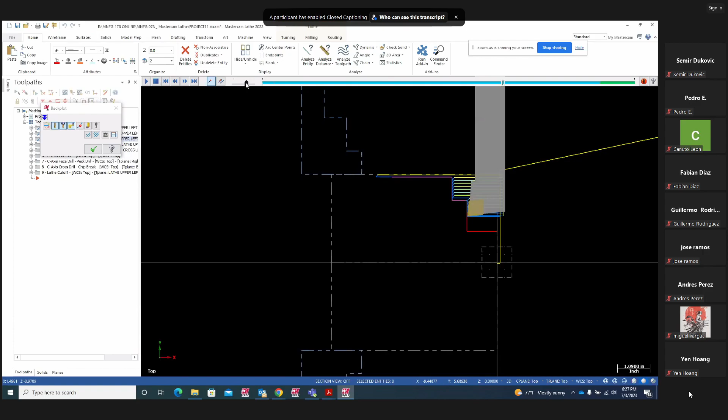So if I'll go ahead and use this guy here, we're going to start like this. We're going to go ahead and face it, OD rough, OD finish, and after that

this comes my C-axis. So this is going to be my finish OD diameter first. Come on, I don't want that.

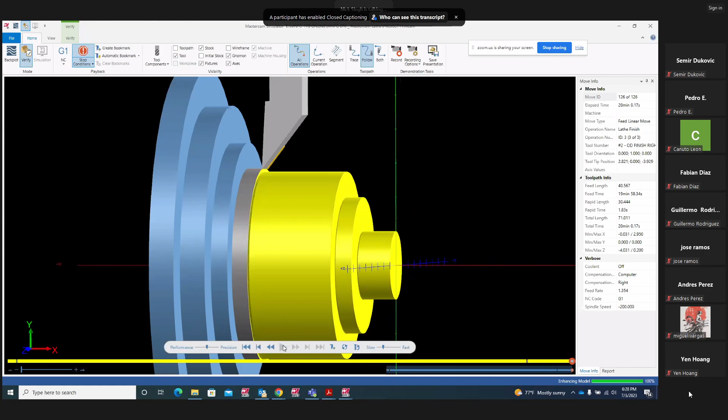This is going to be our OD turning first: face, OD rough, OD finish. Now based on this, we're going to start doing our C-axis stuff, which is going to be, when we're going to draw that, which is going to be this part right here, this guy. Here you go.

So based on this, then we're going to go and start milling the slot. We're going to start drilling on the face. We're going to start milling this outside. So that's your live tooling.

So we're going to jump into this kind of stuff in our next class. I'm going to go ahead and upload the blueprint for this, guys, and we will work on this part. That's going to be our Wednesday night class.